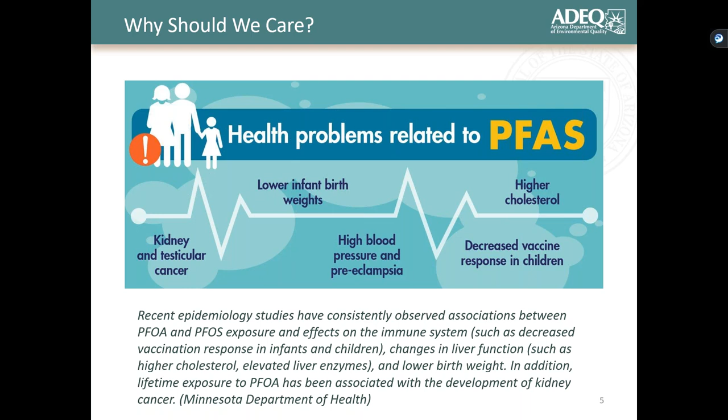So overall, PFAS is an emerging contaminant. It is something that we really, as ADEQ, are trying to take a spearhead monitoring in Arizona because of its public health issues. So what are we doing in Arizona as far as monitoring and sampling?

Well, for PFAS, we have to go all the way back to the UCMR rule. This was set by the EPA, promulgated in the 1990s. Essentially, it's asking drinking water systems to monitor for contaminants that are not yet regulated. Every 5 years they set a new list of contaminants - roughly 30. Any water system that serves more than 10,000 people is required to test for these unregulated contaminants. The UCMR rule helps the EPA monitor unregulated contaminants and judge whether they are of public health concern and if they should be regulated in the future.

There are two iterations that we're concerned with here: UCMR 3 and UCMR 5. UCMR 3 had roughly 30 contaminants that included 6 of the PFAS compounds, and this is when we first started to see PFAS crop up in drinking water in Arizona. The testing period was between January 2013 and December 2015, and we looked at water systems serving more than 10,000 people.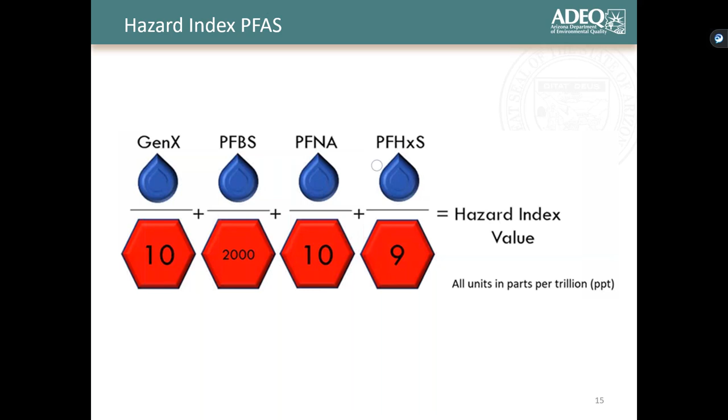So in this example, we have a system that is on a quarterly monitoring schedule for hazard index chemicals. Let's walk through example 1. This is 1 quarter. GenX had non-detect. PFBS, 200 parts per trillion. PFNA came in at 4 parts per trillion, and PFHxS, 4 parts per trillion as well. Run it through the formula, and it spits out 0.9.

For quarters 2, 3, and 4, we get 3, 1, and 2. You add all of these up together in your running annual average, and you get 1.725. Remember, we have to round to 1 significant figure. That's going to round up to 2, and that is an MCL exceedance for hazard index PFAS.

In determining compliance, anything below those trigger levels is going to be considered a non-detect. We also have the PQL, the practical quantitation level, which is related to the minimum detection level in laboratory analysis. The only time this really comes into play is when we are determining compliance with the MCL. During initial monitoring, the PQL is not a concern, but for compliance, anything below the PQL is going to be considered as 0 in the running annual calculation.

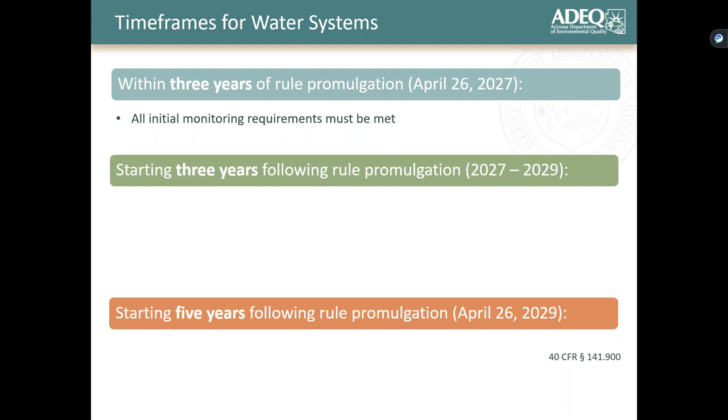So here's the time frame for water systems. It was promulgated in 2024, April 26. 3 years later, we need all water systems to meet initial monitoring requirements. 3 years following that point, so from 2027 to 2029, the results of all initial monitoring should be included in your CCRs, your water quality reports to your customers.

Regular monitoring for compliance must begin after April 26, 2027, and the results of all compliance monitoring must be included in your CCRs. If you miss testing and monitoring for PFAS, you need to submit a public notice, a tier 3 public notice, and this is when monitoring and testing violations begin. Starting in 2029, all systems must comply with the MCLs, and the public notice for any MCL violation begins at this time.

So here's some other monitoring requirements to take note of. Systems must take all their samples at the EPDS during normal operating conditions. That's important. It has to be at the EPDS, no other entry point or sampling point is allowed. If the system draws water from more than one source and the sources are combined before distribution, the system must sample at an EPDS during periods of representative operating conditions.

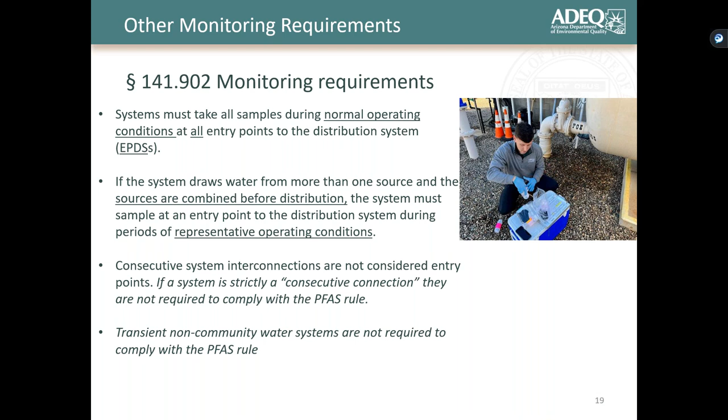So for the initial monitoring requirements, up until that point, April 26th 2027, we need to set schedules for water systems based on the type of source water they have. The EPA is requiring that all surface water systems monitor 4 consecutive quarters within a 12-month period. They call them quarters, but basically we need samples taken 2 to 4 months apart, within 1 calendar year.

The same goes for groundwater systems serving more than 10,000 people—they're also on that 4 consecutive quarter schedule. Groundwater systems serving less than 10,000 people are going to be on a biennial schedule, so 2 samples within a 12-month period, taken 5 to 7 months apart. It's important to note that if a system is using both groundwater and surface water, then they are going to be subject to that surface water monitoring schedule.

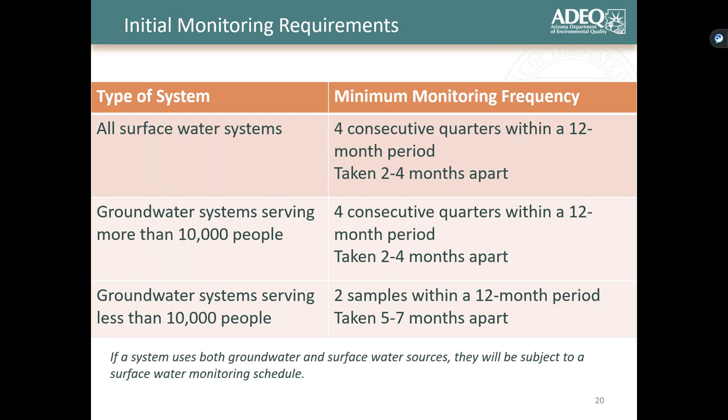So to help fulfill that initial monitoring requirement, the EPA is allowing systems to use previously acquired data. The caveat is that some requirements need to be met. The data needs to be analyzed using only those 2 methods I talked about earlier, method 533 or 537.1 version 2, and the data has to have been collected on or after January 1st, 2019, and otherwise has to meet those requirements of 2 to 4 months apart for quarterly schedules, or 5 to 7 months apart for a biennial schedule. If it meets all of those, then it's acceptable as previously acquired data.

If a system has multiple years of data, the most recent data needs to be used. Data has to be reported to a level no greater than the MCLs. So if the system wants to use supplemental data for reduced monitoring, it has to be reported down to the trigger level. And data collected on or after June 25th, 2024 must be reported down to all rule trigger levels.

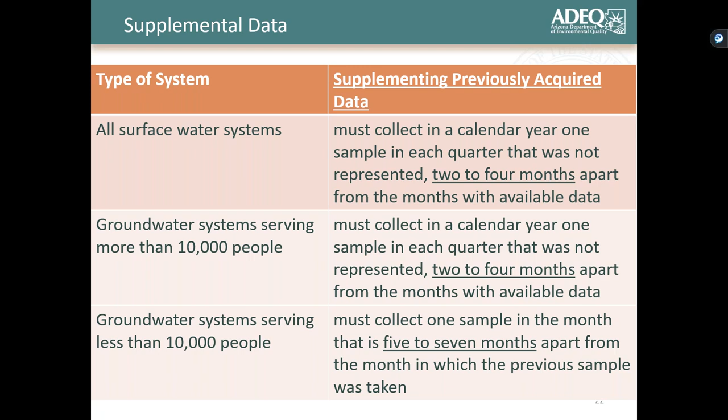So for that supplemental data, for surface water systems and groundwater systems serving more than 10,000 people, they need to collect in a calendar year 1 sample in each quarter that was not represented. I'll get to that in a little bit. For groundwater systems serving less than 10,000 people, they need to collect 1 sample in the month that was not represented, 5 to 7 months apart from that sample they collected.

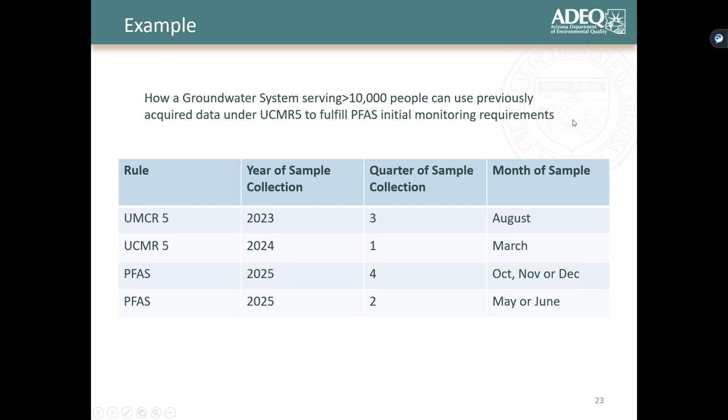So here's a brief example of how a groundwater system that serves more than 10,000 people can use previously acquired data under UCMR 5. As you can see, they have 2 samples that were collected under UCMR 5 in 2023 and 2024. They have quarter 3 and quarter 1 taken care of. So within 1 calendar year in 2025, they need to collect 2 more samples. Basically, they just need to fill in quarters 4 and 2, and that will fulfill their initial monitoring requirements.

So to go from initial monitoring to ongoing compliance monitoring, we have 3 different schedules for your ongoing compliance monitoring: quarterly, which is the default schedule, annual, and then triennial, which is reduced monitoring. 2 important points to note: when we're trying to determine compliance schedules for a system, we are going to take every individual sampling result for all the regulated PFAS and evaluate that. We're not looking at the running annual average, and we're going to compare that to either the trigger level or the MCL to determine the schedule.

Once that schedule is set and determined, compliance with the MCL is determined using the RAA, running annual average, and any result below the PQL is going to be considered as 0. So here's a breakdown of the different schedules and the conditions systems need to meet to be placed onto each schedule.

Quarterly is your default schedule. To get here, essentially, if you have any regulated PFAS concentration that is at or above the trigger level during initial monitoring, you'll be placed on the quarterly schedule. A system on triennial monitoring that has a result above the trigger level will be placed on quarterly monitoring, and a system on annual monitoring that has a result above the MCL is going to be placed on quarterly monitoring. So essentially, it's just the starting point for all compliance monitoring.

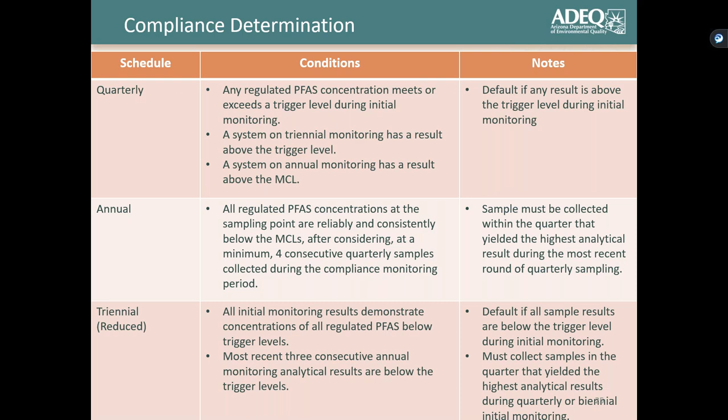If at any point, like on annual monitoring, you have a sample above the MCL, it's going to put you back on quarterly. If you're on reduced triennial monitoring and you have a sample hit above the trigger level, that's going to send you all the way back to quarterly monitoring, and you can start all over again. This is just the flow of how it works, but hopefully that lays it out in a clear, concise way for you.

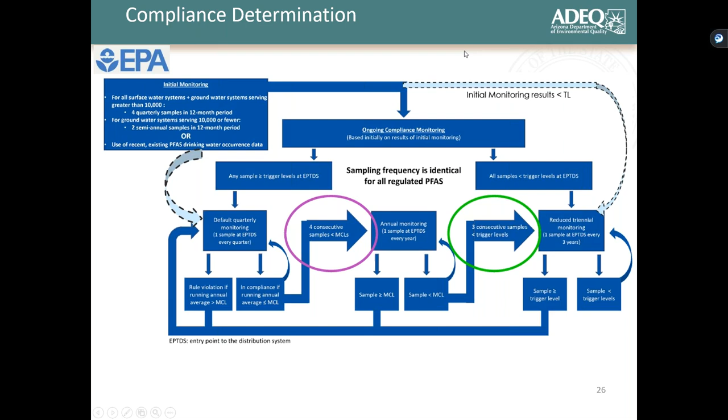Here's just a little bit of practice. So we have a groundwater system that's serving 12,000 people with 3 EPTDS. We're trying to determine both their initial monitoring schedule as well as their compliance monitoring schedule.

Well, we know that they serve more than 10,000 people, and they have hits above the trigger level, so that's automatically going to put them onto quarterly monitoring. So they have 2 quarters. They need 2 more quarters.

All right, good morning, everyone. I'm Hannah Houston, and presenting with me today is Austin Pannkuk. We're environmental technicians here with ADEQ, and we're just going to touch on some basic information on PFAS, and then we're going to review best practices for sampling techniques and some guidelines to follow when out sampling.

So since December of 2022, our ADEQ PFAS sampling team, which does include Austin and myself, have been collaborating with hundreds of public water system owners and operators and contractors to assess the impacts of PFAS on Arizona's drinking water. And to date, we have sampled over 700 water systems statewide.

So PFAS, or per and polyfluoroalkyl substances, as Gavin mentioned, are a class of synthetic chemicals that were developed in the 1940s. These chemicals are widely used in consumer and industrial products to resist heat, oil, stains, grease, and water. So they're very helpful in our common day lives. We encounter them quite often.

Some of these examples are food wrappers from fast food restaurants, coated packaging. We've got water and stain resistant coatings that are used for textiles and furniture, pesticides, and also in materials for building and semiconductor industries. So PFAS, as you may have heard, are referred to as forever chemicals, and this is just due to their persistence in the environment and also their resistance to natural degradation.

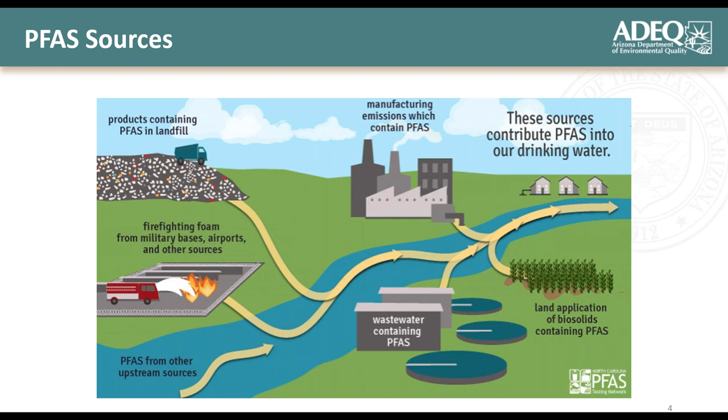PFAS sampling does differ significantly from standard water quality sampling, and this is due substantially to the higher analytical costs and heightened risk of contamination. PFAS analyses can be 2,000 to 6,000% more expensive than typical tests, and these costs can also be influenced by additional quality control measures such as field blanks.

Detections are analyzed in parts per trillion, or PPT, which is roughly equivalent to a single drop of ink in 20 Olympic-sized swimming pools. This amplifies the potential for environmental and sampler contamination, given the ubiquity of PFAS in our everyday products.

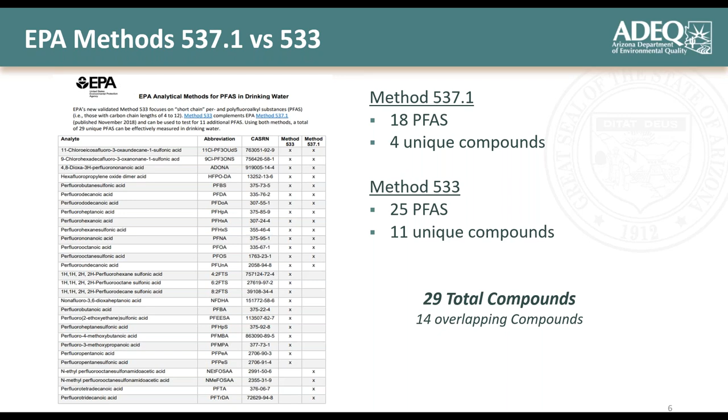Some key differences between those 2 methods are the hold times and the preservatives. Method 537.1 version 2 requires Trizma preservative and has a hold time of 14 days, while Method 533 uses ammonium acetate and has a hold time of 28 days. Both methods require a field blank with the corresponding preservative to ensure data integrity. It's not mandatory to use both methods when sampling, but if you do, it provides QA/QC and could reduce the need for possible resampling or the risk of unreliable data.

Now I'm going to turn it over to Austin. He's going to go more in depth on the sampling techniques and guidelines to follow.

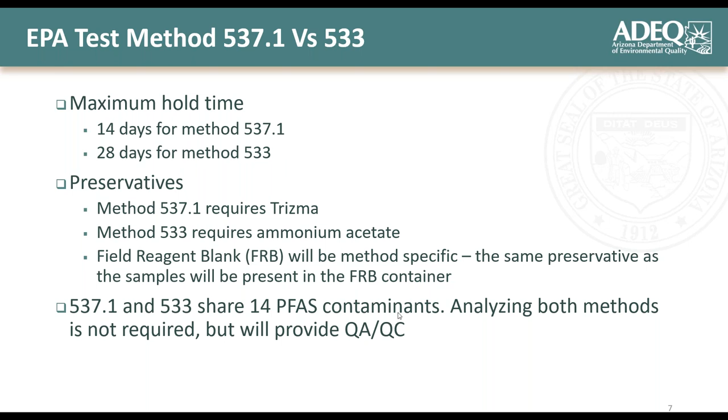All right, thank you, Hannah. PFAS sampling is something that not many have experience doing. We're glad to have the opportunity to share our experience here with PFAS sampling and talk about the nuances compared to other types of sampling.

This slide provides an overview of things to consider when collecting a PFAS sample. We'll go into further detail on each of these points in the next few slides. When you're in the field collecting PFAS samples, ensure you are adhering to the standard operating procedures, trainings, and checklists provided in this presentation. Our SOPs for each method can be provided upon request, just reach out via email and we can share them with you.

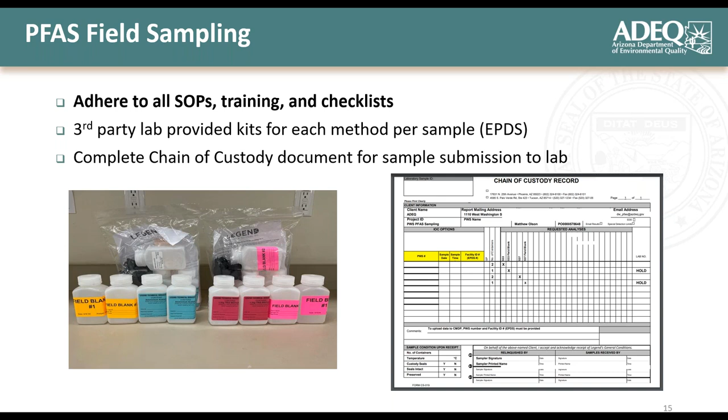We use sample bottles provided by a third-party lab. These kits come with a field blank, 2 grab sample bottles, a set of nitrile gloves, and a bag for storage and transportation. A complete and accurate chain of custody must be submitted for every sample delivered to the lab.

Since we're talking about parts per trillion with PFAS analysis, cross-contamination is a big concern. We want to ensure we are not bringing anything into the field that could impact the sample. This is a list of prohibited and acceptable items to bring with you in the field when collecting PFAS samples. It's pulled directly from our standard operating procedures and should be consulted before going into the field, to ensure you are not bringing a potential contaminant to the sample site. We'll go into more detail on field equipment, field clothing, and PPE in the next few slides.

Moving down the list to sample containers: sample containers will not be an issue if you use the kits provided by our third-party lab. LDPE or glass containers and Teflon-lined caps are prohibited, but HDPE or polypropylene containers and unlined polypropylene caps are acceptable. For rain events, avoid using any waterproof or water-resistant materials.

In the case you have a gazebo to protect you from the rain, only touch or move it prior to and following sampling activities.

For equipment decontamination, avoid using any disinfectants, but if necessary, Alconox or Liquinox and potable water from a municipal drinking water supply are acceptable, but try to avoid using water from an on-site well. For food and drink, avoid bringing anything to the sample site, with the exception of bottled water or hydration fluids, but make sure you only consume these in the staging area.

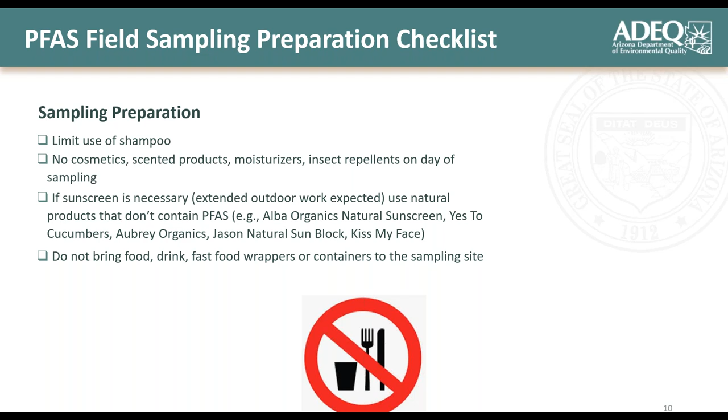Again, avoid bringing any food, drink, and fast food wrappers or containers to the sampling site, with the exception of water or hydration fluids that can be consumed in the staging areas.

You want to wear well-laundered clothing that has not been washed with fabric softener. Avoid clothing with materials like Gore-Tex, new cotton, or synthetic water-resistant or waterproof clothing. Boots and wet weather gear can be made with polyurethane and PVC, but waterproof or water-resistant materials are prohibited.

Avoid using plastic clipboards or binders. We typically use aluminum clipboards with non-waterproof paper, and traditional ballpoint pens or pencils. Sharpies are prohibited at the sample site, but can be used in the staging area if necessary. Just make sure you don't use these Sharpies on the sample bottles.

Do not use waterproof or treated paper or field books, plastic clipboards, Post-its, or other adhesive paper products. Use Ziploc brand bags for sample storage and shipping if necessary. Our kits from our third-party lab include a bag for storage and transportation, and only use wet ice for sample preservation. Try to avoid using chemical ice packs like blue ice.

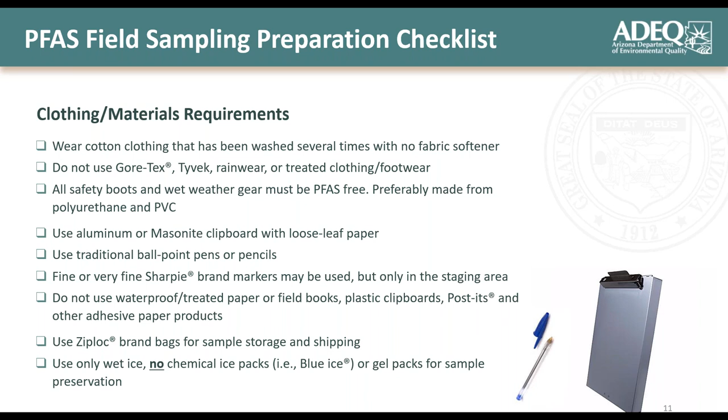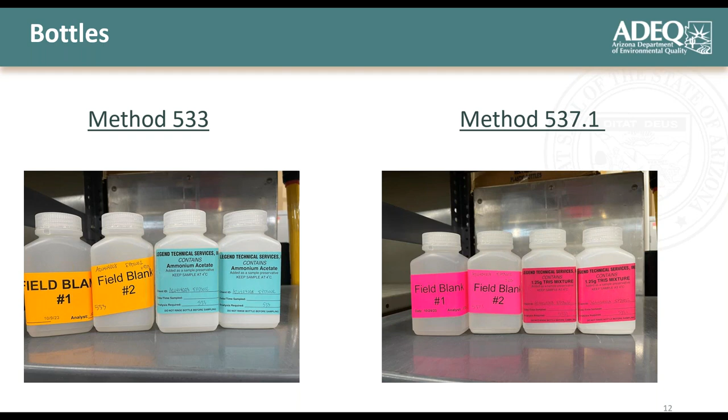Both the grab sample bottles and the field blank are labeled with the PWS number, the EPDS number, as well as the method number. There's a space below the PWS number and the EPDS number for the date and time, which will be completed at the sample site. As always, ensure all information on your bottles matches exactly to what's on the chain of custody.

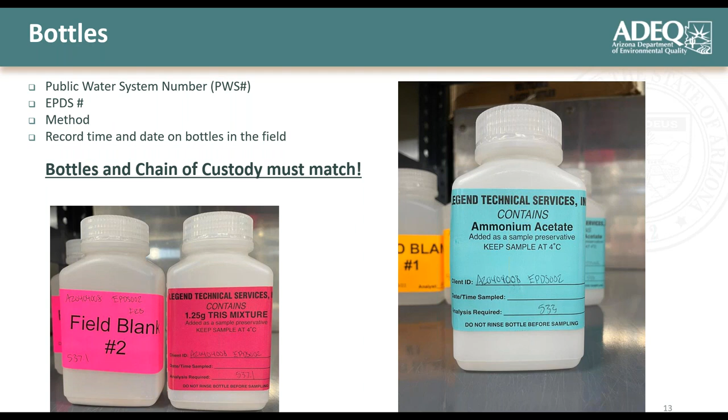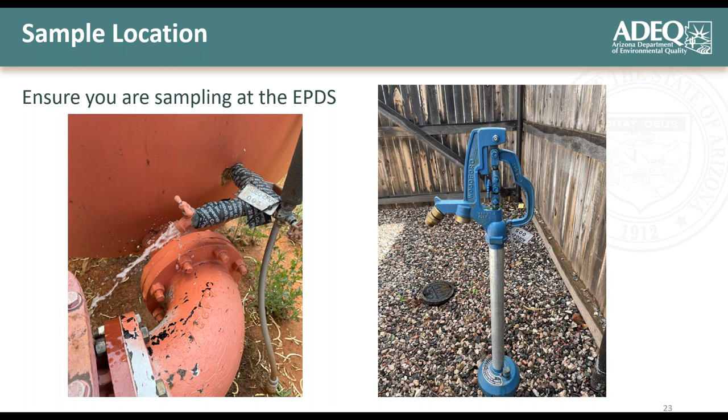Next, we'll talk about the sample location. The EPA requires these samples to be collected at the EPDS, or the entry point to the distribution system. Entry point or EPDSs can look very different, as seen in these photos. If your system does not have a tag, we'll discuss how to find the EPDS in the next slide.

If you're unsure where your EPDS is, just think about the flow of your system. Identify where your facilities are, like your well, your storage, or your treatment. The EPDS will be the last sample tap after these facilities, but before the distribution system or before water is piped into the building. Sampling at the EPDS will ensure you are analyzing finished water, which will show the best representation of the water your customers are using.

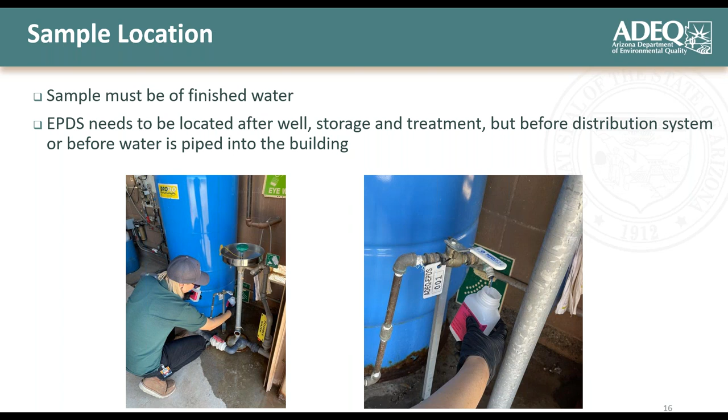Once you have found the EPDS, begin to flush for at least 5 minutes. One important lesson we have learned is the importance of flushing and ensuring there's little to no turbidity in the water. Turbidity in the sample can impact the equipment the lab uses to analyze the samples. If you notice the water is cloudy or dark in color, just continue to flush until the water is clear. If you fill a sample bottle and notice sediment sinking to the bottom, make sure you discard that sample bottle, get a new bottle, and collect a new sample.

Again, you do not want to wash out the preservative in these bottles, so the sample cannot just be dumped out and refilled. It is better to take the time to collect a quality sample. Failure to do so could result in clogging lab instrumentation and possible rejection of the sample. This would cause issues for the lab and would also require you to spend more time and money resampling.

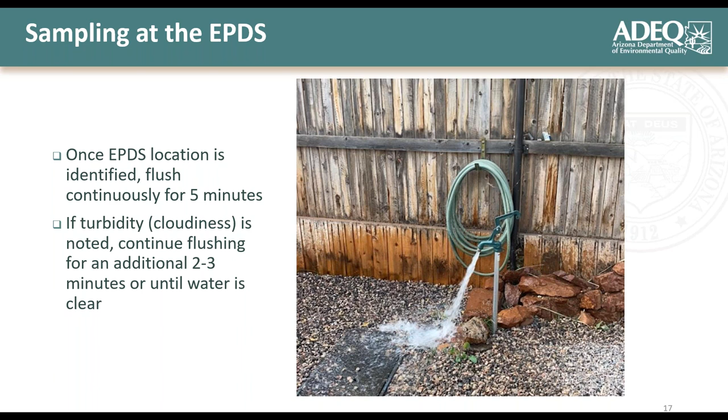Field blanks need to be taken for each method at every EPDS sample. As discussed previously, field blanks will be analyzed if the grab samples show a detection of PFAS. But if you write hold on the chain of custody, the lab will not run those samples if there is no detection.

The pre-filled field blank bottle contains lab-tested PFAS-free water. If the field blank is analyzed and comes back with a detection, it indicates there was some type of contamination at the sample site. Field blanks provide quality control and are required when sampling for PFAS.

Moving on to sampling technique: thoroughly wash, rinse, and dry your hands before collecting the sample. We recognize there may not always be an opportunity to wash your hands right before sampling. In cases like this, just wash your hands wherever you can and try to avoid touching anything that could potentially contaminate your sample until sample collection is complete.

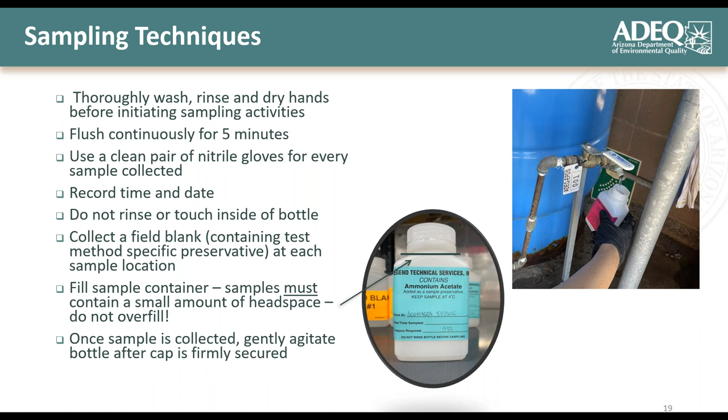As you can see here in the photo to the right, the sampler has a pencil-thin flow rate and is holding the bottle close enough to the sample tap so there's no backsplash, but far enough away so the bottle lip does not touch the tap. Then once the sample is collected, gently agitate the bottle after the cap is firmly secured.

As soon as you have completed your sample collection, place the samples either in a Ziploc bag or the lab-provided bag and put them on ice. It's important to start cooling these samples as soon as possible. Samples need to be cooled to 4 degrees Celsius, plus or minus 2 degrees, by the time they reach the lab. Also ensure you have a temperature blank in the cooler.

In our experience, if you collect a sample and deliver it to the lab within 2 hours of collection, the samples do not have to be at temperature, but still need to be on ice. This is the only case where delivering samples to the lab over temperature is acceptable. Also note that samples delivered frozen are not acceptable.

In our experience, the lab requires us to submit samples within 48 hours of collection, and this is just due to the hold times of method 533 and 537.1, which are 28 days and 14 days respectively. The lab needs as much time as possible to process and analyze these samples. So again, make sure you have your chain of custody forms with you and that they match all information on the sample bottles. If you have any questions regarding hold times or sample receiving, just contact your third-party lab.

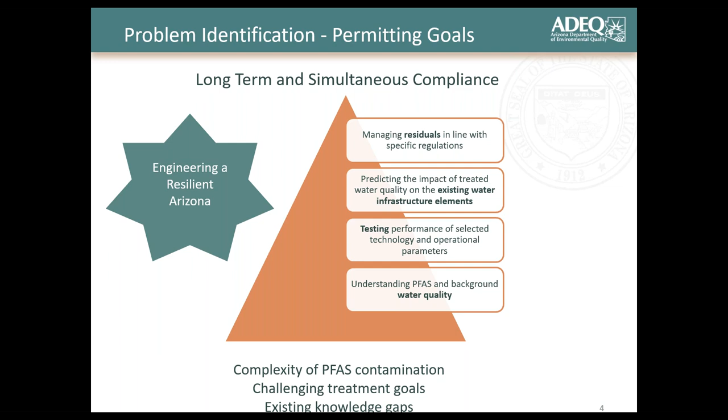So if you go a step deeper now, you will find that we have 6 permitting steps, defined in this order. First, you have to do sampling and analysis of water quality parameters. The purpose of this first step is really to determine PFAS speciation and interferences, but also to go beyond that and understand all the variations that you may have in your system.

After you're done with step 1, you should go and do preliminary design. Preliminary design means that you are supposed to select the technology type that is most suitable for the system's need. And when we say system's need, that means you have your goal, but you also have specific technical, managerial, and financial capacity.

When you are done with step 2, you go on to step 3 and you do technology evaluation. The purpose of this is to select optimal media and operational parameters.

After all these 3 steps, you go on step 4, which is approval to construct. That's actually the first time when you submit this ATC application to ADEQ, and the point of this step is to get approval to permit the final design and start your installation.

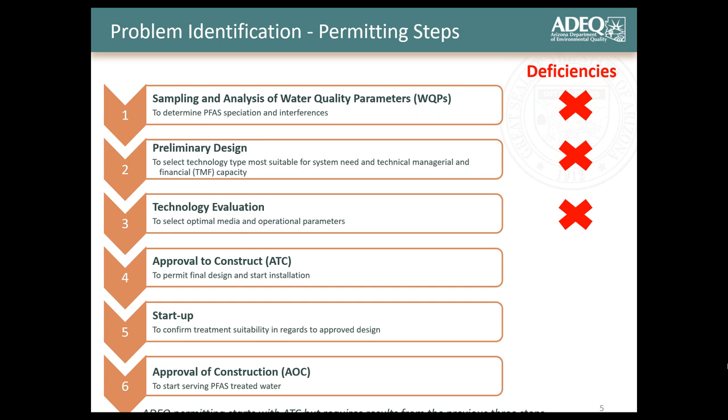So when it comes to available support and program specifics, specific programs available for PFAS, we have sampling on one side, and that means UCMR5, and also in Arizona, we have state sampling. But on the other side, we also have funds for mitigation. So this is what is available.

But the question is, is this enough for implementation? How to bridge these two available programs and support, and at the same time avoid mistakes in the 3 steps that I showed in the previous slide.

In other words, when you get PFAS exceedance, what do you do next in order to get funds and start building your mitigation without deficiencies? Well, this is where the gap is.

A simple manifestation of this gap is a common question that we hear from public water systems. Basically, when they see PFAS exceedances, they come to us and say, okay, now what? So this issue exists regardless of system size.

In Arizona, we have about 12% of public water systems, or specifically 115, regulated by the PFAS rule that will need some kind of mitigation. Of those 115, 90, or basically the large majority, are small systems, and they serve less than 3,300 people. And this is where this gap becomes even bigger.

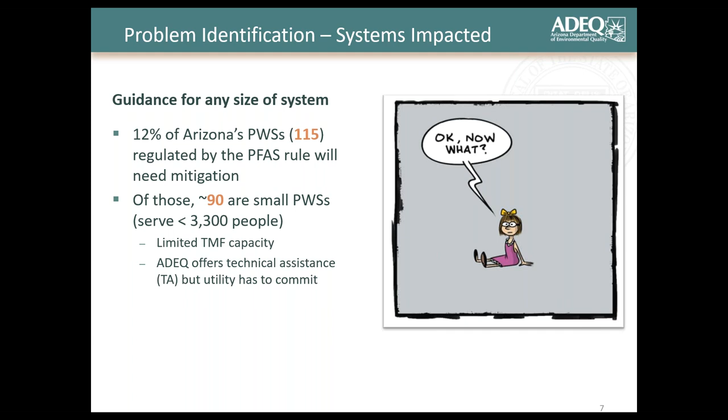And that's why we actually did this guidance to help close this huge gap. And this is the approach we took. So it's very important to define the purpose of whatever you do. In this case, we said we are doing this guidance in order to assist public water utilities. We want to assist them in making informed decisions about the most suitable mitigation strategy.

After the purpose, the question was, who is our audience? This can be very wide, and I have to tell you, whatever we say, there will always be some other side saying, well, why didn't you direct this towards us? But in this case, we said we are talking to engineers who will assist utility decision makers.

This is very important because for all of these projects, you have to have an engineer, and eventually the engineer is the one who is submitting these projects for approval. I have to stress here, we have different level engineers, and that's all fine, but PFAS is a very complex topic. So if you are looking for an engineer, you really want to look for someone who has previous experience, not necessarily in PFAS, but in water treatment design, because that's what you are looking for here.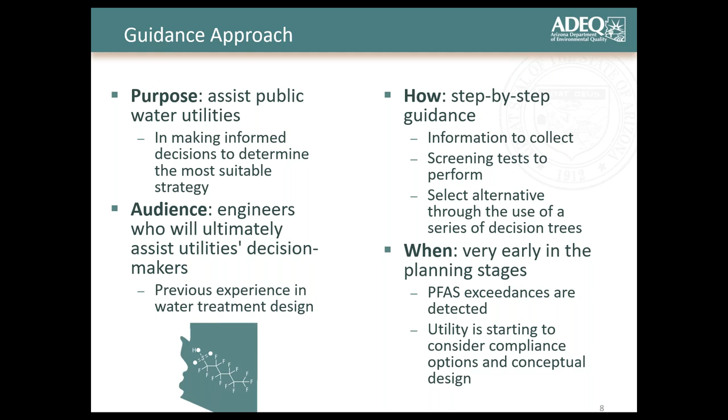So to do something like this, you need a team. But now when this document is published, I can confirm that yes, it takes a village basically. But that's the key point and value of this type of document. It's not made in a vacuum.

So stakeholders were involved from the very beginning. When I say stakeholders, that means we had multiple people from state government, then federal government, specifically EPA, or the office helping us here. Then we had non-profit organizations, leading media manufacturers, and consulting firms. And you can imagine how these people are competitive, but it was very important to bring them all together and find something we all agree to.

So let's now go into specifics and talk about what information you need in order to run this tool. To do any kind of design, you need information and data. There's nothing new about it. You can organize this and say you need to collect knowns and screen unknowns.

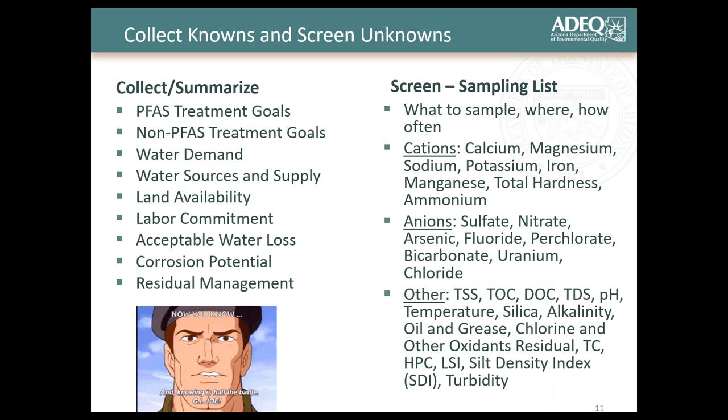So let's now talk about analysis - how to analyze with the end goal in mind. I know that with this line I'm starting to sound like a project manager, but I found it very appropriate in this case, and here is why.

End goal is very straightforward, and that's because we all want the same thing - we want to mitigate PFAS in the easiest way. But how to be more specific about that easiest way? Well, we can say in a smart way. And that means you want to get your solution in a specific, measurable, achievable, realistic, and timely manner.

So that's why we say the goal is the same for everyone, but circumstances vary and they dictate approach. And that approach can be through non-treatment or treatment options. This is how it works - your starting point should always be non-treatment, and that's because this is usually the best shot for all systems, especially those small and disadvantaged.

I don't expect you to see all the details now, but it's very important to understand that these details are your solutions for specific situations. So when you go and download this document, take a look, don't skip things. It's very important to read all of this.

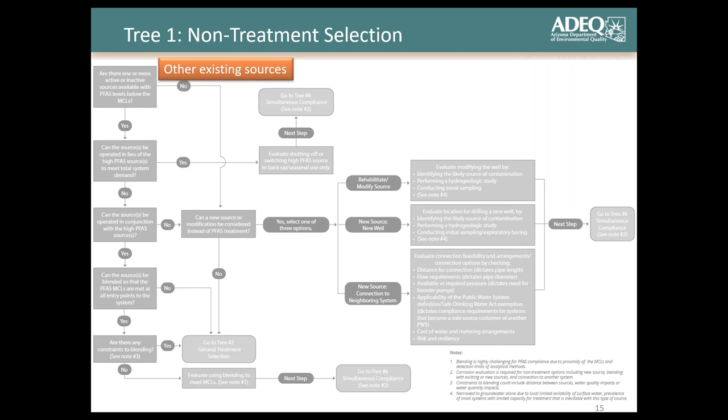But in a nutshell, non-treatment starts with asking you questions about other existing sources. And this is because you may have options to switching or to blending.

And if this doesn't work, you should think about developing new or rehabilitating existing sources. And here you have three options. So first, you should start with the option that says connecting to nearby system.

This is something that's usually opposed by systems, and it's probably because of water rights. But we had a few successes so far, and I just want to share that water rights are one thing, but eventually when you put everything on paper, when you consider what you have to do, like are you going to do the treatment yourself, or if you have potential to connect to a nearby system, are you going to do that? It's really like that techno-economic analysis.

It takes a lot to run treatment yourself. And then when you put that, you know, what it takes, but also how much it costs, I have to tell you that systems are happy eventually to connect with that nearby system if it's available. Unfortunately, that's not the option that is available for everybody.

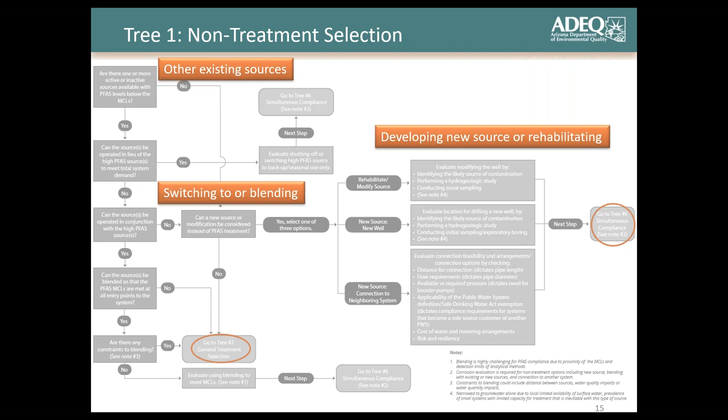And before I jump on treatment, here are a few basics incorporated in treatment trees that I wanted to cover before we go with that. First, I want to say that trees are focused on best available technology, and that's because this is your safest choice - the most reliable alternatives that have already demonstrated full-scale efficacy in the field.

And then it's important to understand that PFAS is not a traditional contaminant. So you really want to avoid backwashing here. And the only way to do that is to have pre-treatment to manage that fouling. Then think about competition.

PFAS is a PPT contaminant. So basically, everything in higher concentration is competing with the PFAS. It can be TOC, it can be anions. All of this is affecting media lifetime, and PFAS is basically losing this battle because it's in very, very low concentration, which is 3-6 orders of magnitude lower.

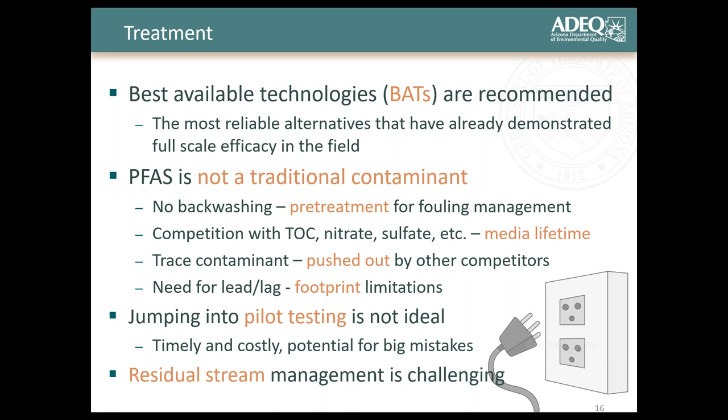Let's see how all of that is organized in the decision tree. First, we're going into general treatment selection, whose purpose is to indicate potentially more suitable treatment alternatives based on general questions. Here's what it means.

You're first asked about oxidation at the source, because not all treatment technologies are compatible with oxidants. Based on your answer, potential issues will be identified and options to solve them will be addressed. So the point of the questions is not to stop you, but to provide solutions, provide solutions for how you bypass the issues you have.

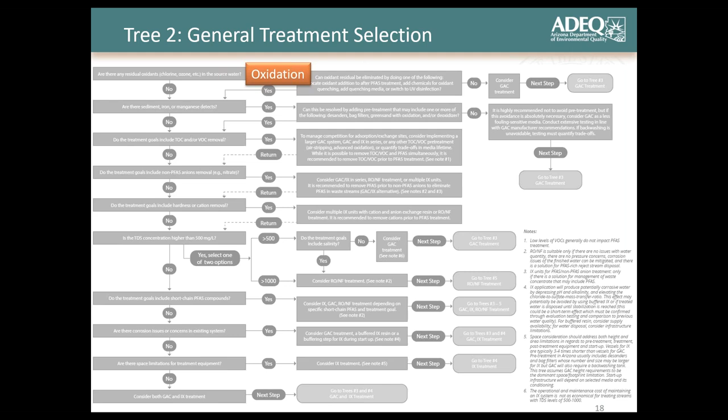The next question is about fouling. I mentioned this before - you don't want to backwash, but backwashing is for fouling. So how do you manage this? Well, you think about your fouling potential. When we say fouling, you have to think about particulates, organic fouling, inorganic, and bacterial fouling. It's a wide range of things that can foul your media.

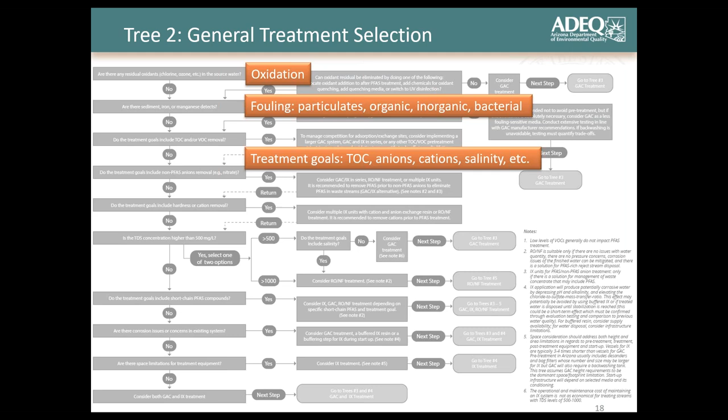Then think about treatment goals. So okay, it's PFAS, but are you targeting TOC here as well? Are you targeting any other anions or cations? Do you have any salinity issues? Eventually, what's your PFAS chain length? What are your corrosion concerns? And how much footprint can you afford for the treatment?

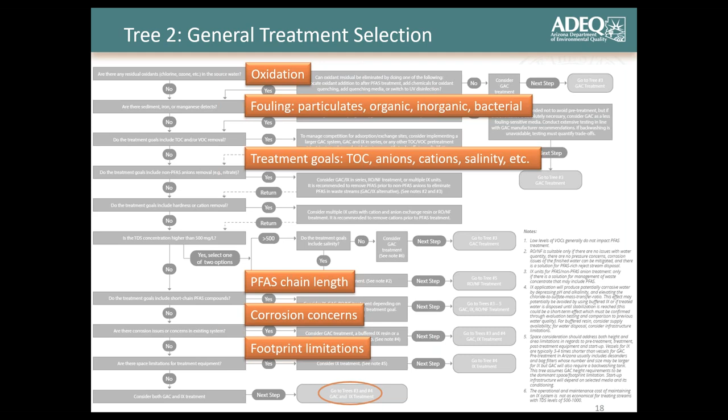Eventually you'll end up with one or more technologies, and you'll be prompted to more specific analysis about them. If that's GAC, here is the decision tree. So again, we're running through the questions, but in a more specific way, specific for GAC.

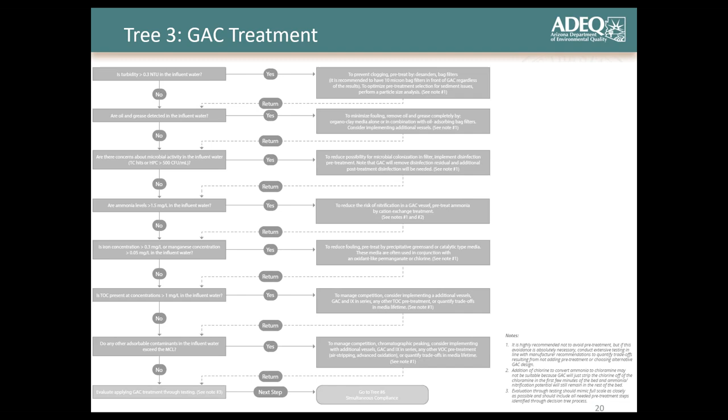Your first question will be about fouling. Again, pre-treatment is key for PFAS treatment. So run through this again, be sure what you have to deal with.

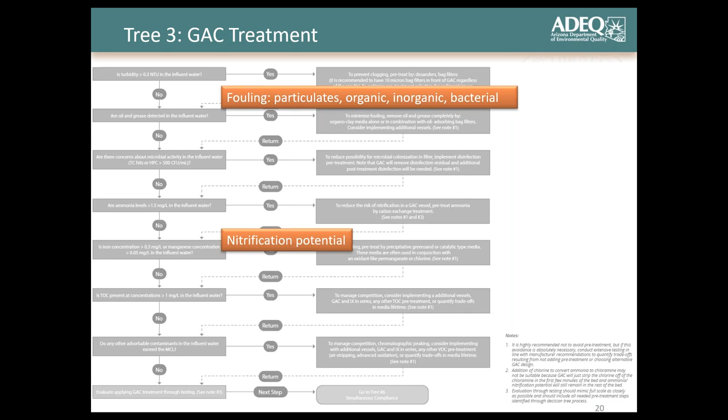Then think about nitrification potential. If you have ammonia in your source and you have GAC, you can get that nitrification issue. So you have to solve that.

Then competition - the major competitor here is TOC, but also all the other organic things. Focus here is on TOC because TOC is in ppm concentration, so it's really competing for that GAC.

And here's a very important message. It's asking if you have TOC more than 1 ppm. People very often ask me, why 1 ppm? Well, this is because we know competition will start to play here at this concentration, and that will affect media lifetime. This concentration doesn't tell you to stop - if you have more than 1 you cannot use it - no, it actually says this will impact your media lifetime and eventually your cost analysis. So this is a red flag. Consider this, because it will affect how much you pay every time you change your media.

So finally, each tree leads to treatment evaluation. This is because these trees offer you preliminary screening, but you still need to get more specific about treatment performance, and you do that through treatment evaluation, through treatment testing. There's also simultaneous compliance to check, which basically tells you how this PFAS solution may affect other processes and rules.

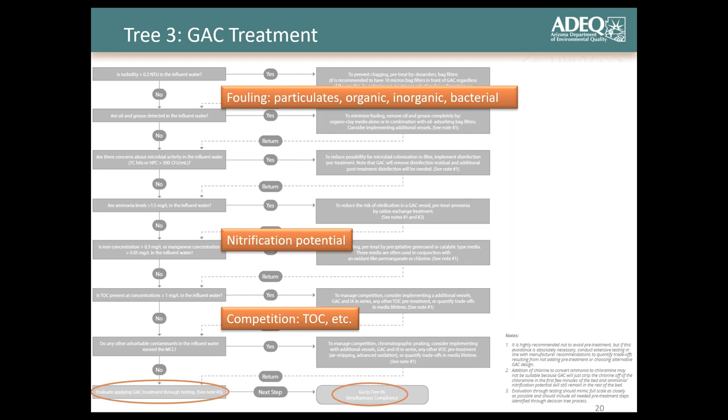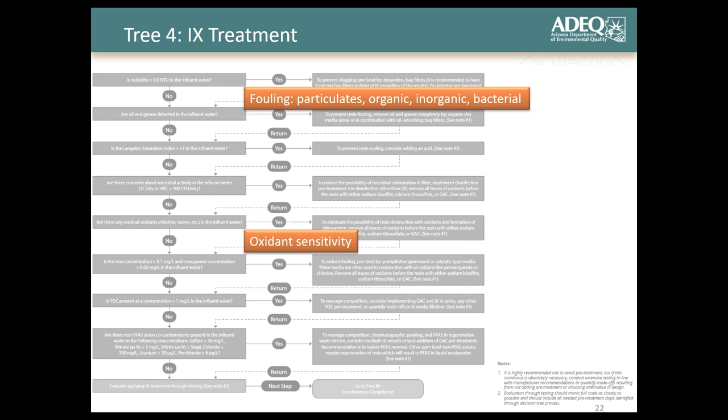If you do, this will degrade your ion exchange, but it will also make a byproduct called nitrosamine, so be sure that you check for this. There are solutions provided here, but you have to avoid having any oxidant in contact with your ion exchange.

When it comes to competition, now we're talking more about anions, so they compete more here. With GAC we had organics and TOC; here we have anions such as nitrates and sulfates. So this ion exchange will remove more than PFAS - if you have nitrates and sulfates, it will remove them as well. The tricky thing is that nitrates and sulfates are at ppm level, and these ppm levels are very high. In sulfate's case, in Arizona, we have a few hundred, so competition is very high.

Again, competition affects media lifetime, affects your cost. Like with the previous tree, when you check all of this, it will lead you to evaluate this treatment technology and eventually to go on to simultaneous compliance.

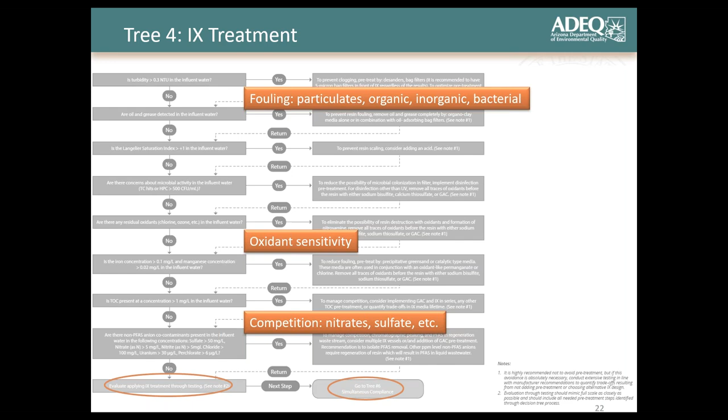Finally, the third best available technology is high pressure membranes, and here we have RO, so reverse osmosis and nanofiltration. While this approach should not be the primary option for Arizona, it is important to say that there are situations where this is the only and best way.

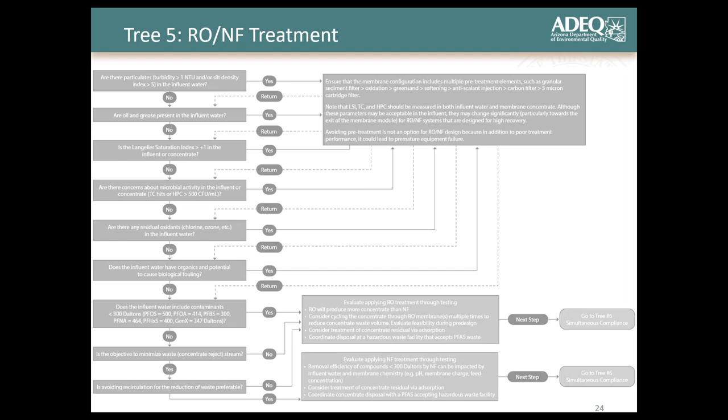Examples for this application are usually complex water matrices with extreme salinity and multiple treatment goals. Specific for membranes is that pre-treatment is not a choice or part of optimization like what we had with GAC and anion exchange.

But rather a necessity because of potential for equipment failure. So first you have the question about fouling, and again, all of these fouling categories. Before I go on to the next one, I want to say that fouling characterization is not only a matter of raw water here, but also recycled streams, because this is what you have with high recovery membrane processes.

With adsorption, you really think about fouling in your influent stream, in that raw water. But here, you also have to think about this for the stream that you are going to recycle to get that high efficiency recovery. So it's more into that.

Then you will think about oxidant sensitivity, because polymers are again the basis of these membranes. So you have to be sure that you protect the membrane from degradation. Oxidant should not be in contact with any kind of polymer. The membrane has to be protected.

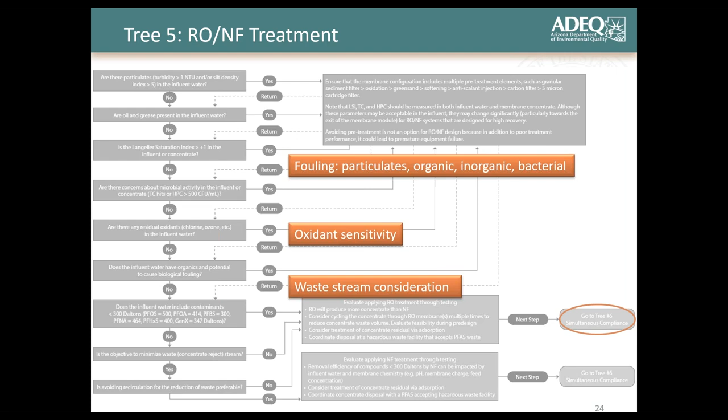Again, after you run all of these questions, you will be directed to simultaneous compliance. Let me tell you now about simultaneous compliance. Here is the official definition coming from EPA. But in other words, I would say simultaneous compliance means whatever you do for a new contaminant, like PFAS in this case, whatever change or adjustment you make, you want to be sure that you don't mess up the downstream processes and other rules. You want to address PFAS, but not at the cost of any other regulation. In this case, the simultaneous compliance tree is focusing on corrosion control and bacterial control.

Corrosion control is very important here because any kind of change in source water or treatment requires you to do a corrosion control evaluation, because all of these changes can affect corrosion. So you have to go and check what those impacts are. And then when it comes to bacterial control, it's really focused on treatment techniques.

Because whatever you do, you will have water stagnation within your filter. And then depending on the treatment technology, you can also have fines in your effluent, and those fines can carry bacteria. So you want to be sure that you have disinfection as the last step of your treatment train.

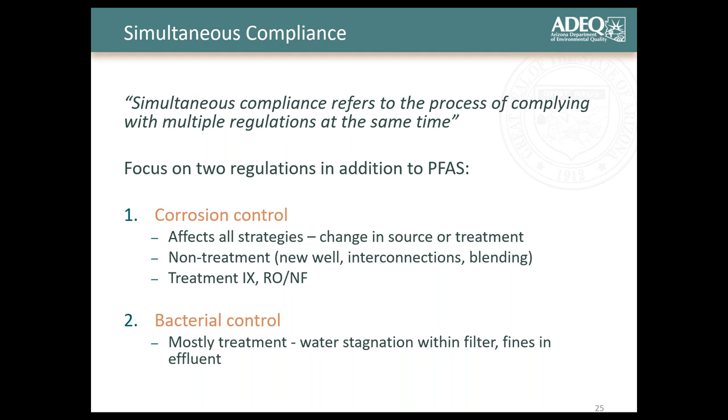Okay, here is the simultaneous compliance tree. You can see that the difference is basically made between non-treatment and treatment alternatives. But both of them lead to corrosion evaluation, because as I said, the corrosion rule says if you have any kind of source change or treatment change, you have to go and check for this.

And then eventually treatment will lead you to post-disinfection. If you didn't have disinfection before in your system, you should also know that after adding one, you should go and check corrosion control evaluation. You should do that evaluation because any kind of disinfection changes the oxidation potential of water, and with that different oxidation potential, there's concern about corrosion.

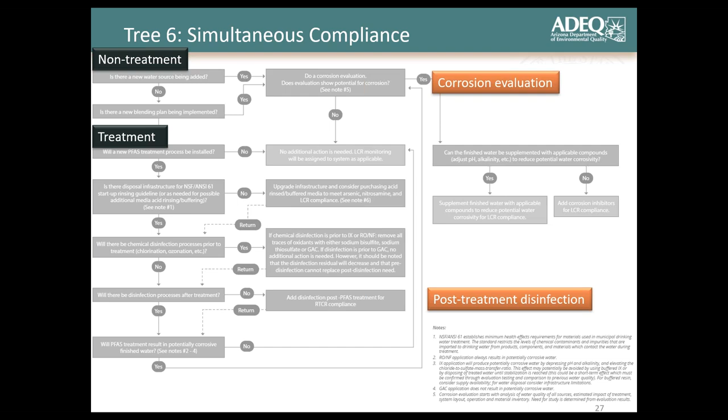So I will now go and summarize key takeaways from the decision trees. First, I would like to say that selection of the best PFAS mitigation is utility specific. There are many factors to consider here, and it's more than media lifetime. So if your neighbor has one type of treatment, don't think that's your best option. It's okay to consider that, but this is really utility specific.

Before you jump into treatment, consider non-treatment. That's your starting point, and that should really be a priority to explore for small and disadvantaged systems, because that's the easiest way to address this. If you really have to do treatment, I have to say it's not easy, but yes, you can achieve that.

If I was asked about one major thing that makes PFAS treatment different than any other treatment, I would say don't forget about pre-treatment. It's essential here, and it's probably required. I didn't see any PFAS treatment going without pre-treatment. So don't forget about that.

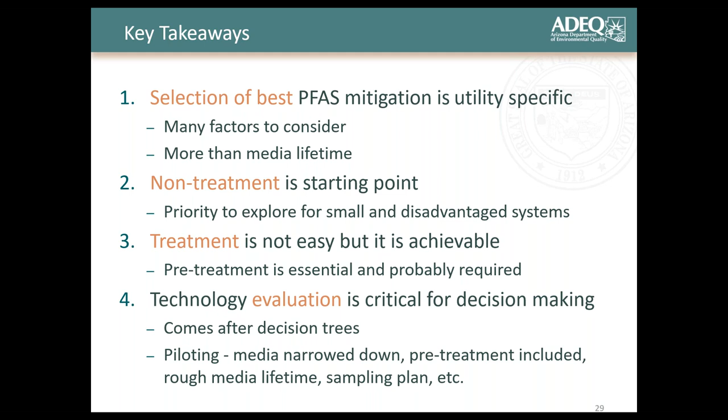Then collaboration. Collaboration is very important here. I would say there are 4 major parties when I talk about collaboration. It doesn't mean it's limited to 4, but at least I see 4 major ones. So you will have the utility that has PFAS and is seeking a solution. The utility will have an engineer, and the sooner you get an engineer, the better it is, because the engineer is the one that is going to make this connection.

The engineer will start working with vendors, getting their support, and then before applying for anything from ADEQ, that engineer can definitely come to us and clarify all kinds of requirements, get answers on all the questions.

But we want to see clear expectations from the utility, involvement of the engineer, and vendors and manufacturers are there to provide support, so use that. Eventually what we are trying to do here as a regulator is to provide transparent expectations, because if you know what you are looking for, it should be much easier for you to do that, and for us also to permit your solution.

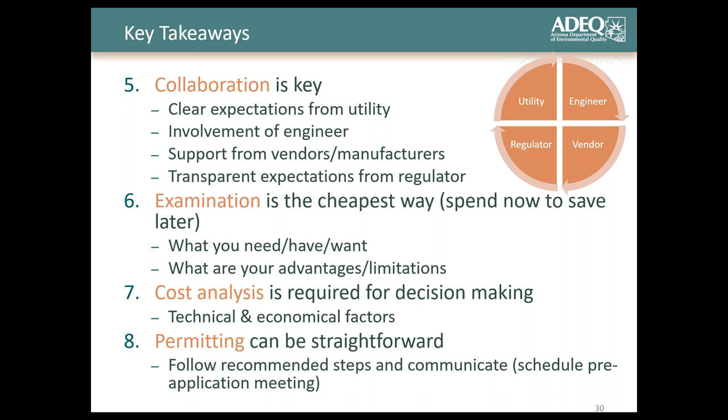And now I would like to switch to support from ADEQ. So this is beyond decision trees, but if you didn't do it already, please get your copy now. Here is a QR code. It's available on our website, and just yesterday we also published an interactive version. See what works better for you, either go through all of these decision trees, or the interactive version will ask you specific questions, and then based on your answer, it will lead you to another one.

That's about decision trees, but there are other available resources. So all our trainings are available on our YouTube page, and here is again a QR code to get you directly there. This training will also be available on the same place. And I think my colleagues talked about this before, but there is a PFAS interactive map, so you can see the latest results through that.

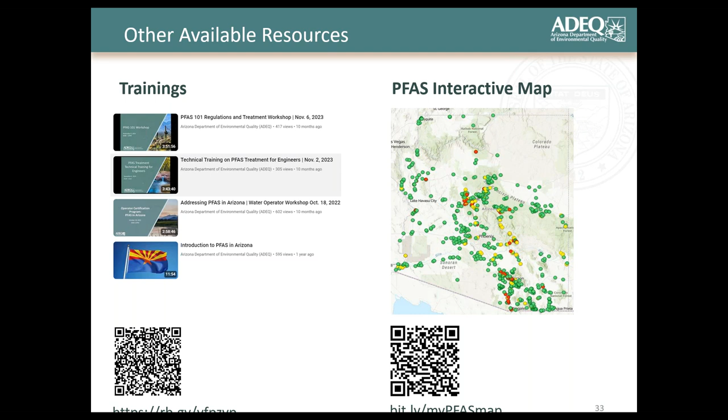And hopefully this is not the end of support coming from ADEQ. Our future plans are based on 3 groups of activities: we are working on guidance documents, we offer pre-application meetings, and we do a lot of trainings. And this is a great opportunity to announce that our second PFAS forum is scheduled for February 13th.

2025. It's going to be an in-person event in Phoenix, and I expect that the ADEQ announcement about this will come out soon. We had one last year, also in February, and it was a great success. So we are hoping to repeat that and provide all new updates with this upcoming one.

But now, if you focus only on guidance documents, I would like to say that we are working on a few of them, and they all rely on decision trees, because decision trees are basically the foundation. So we are working on testing protocols, cost tools, waste management, and point of use and point of entry guidance documents. If you have something else in mind or are looking for collaboration, please let me know. But this is what is in process as of now.

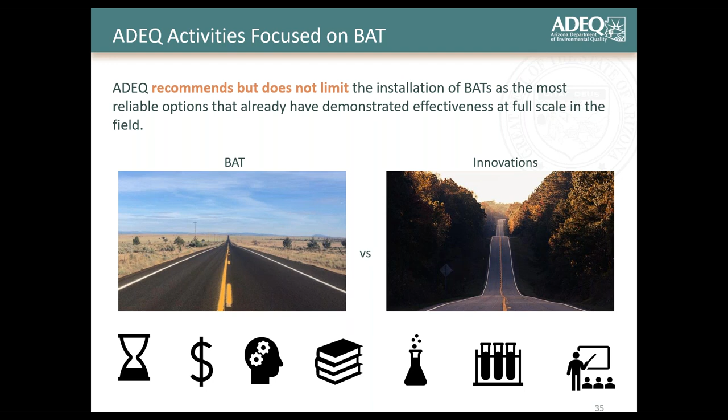And then I have a few slides just to provide a sneak peek at what is coming. I think we are good with the time, so I will keep going here.

Then how to define hydraulics, because when it comes to pilot testing, you want to mimic your full scale. So you have to do that pre-analysis. You have to know what is the empty bed contact time that you will have in your full system, but also hydraulic loading rate. You define that, and then based on your plan for full scale, you come back and apply that to pilot. That's the only way to get meaningful results.

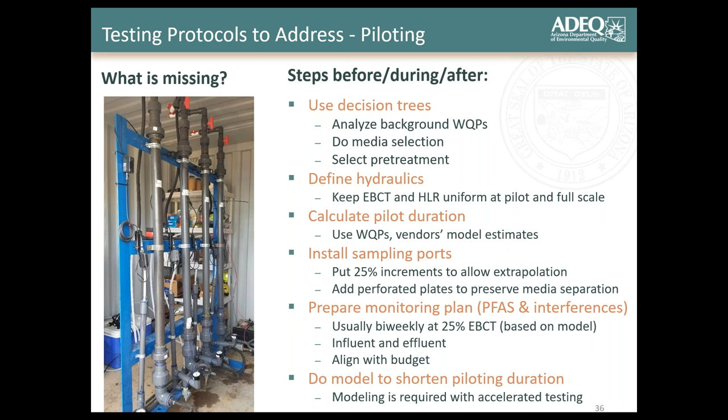And then, as I mentioned before, think about modeling. Modeling can shorten pilot duration. We also plan to provide guidance here on what models are available, how you access them, they're free of charge, and as far as I know EPA is also providing support on how to run these models. But you have to be very specific here, you have to know the purpose of the model and how to use it at what stage.

The most common mistake is that people think a model can replace testing. No, it cannot. A model can supplement testing, and that's a great combo. But don't think you can just go and do the model yourself, because all models are about calibration. You have to put in good test data, beyond just water quality parameters, in order to get reliable model predictions. So it comes down to your interpretation, but model and pilot testing combined, that's a great example of collaboration.

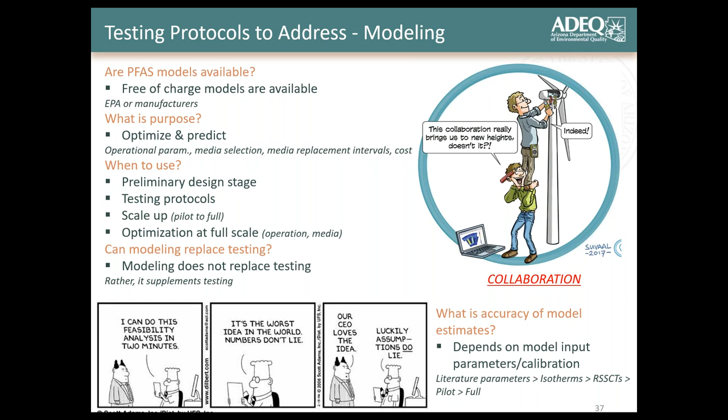Then, as I mentioned before, the other guidance document we are working on is point of use, point of entry. That document should come out soon, I'd say next 3 months if I have to guess, at least that's my plan. This document is going to be structured as frequently asked questions, because none of us have time, so if you have specific questions, you should be able to jump between them and get specific answers.

This document is going to cover more than PFAS, but it's very important to know that at the moment, point of use and point of entry devices are not recognized as a compliance option for PFAS. This isn't connected to ADEQ, this isn't our standpoint. It's basically because there is no NSF certification at the moment aligned with the MCL. So what's on the market are units certified for PFAS at an effluent of minimum 20 ppt, which is 5 times more than the MCL.

We expect this is going to be solved soon. I know NSF is working on that, but until then, you can use this for your household, but it cannot be approved as a compliance option.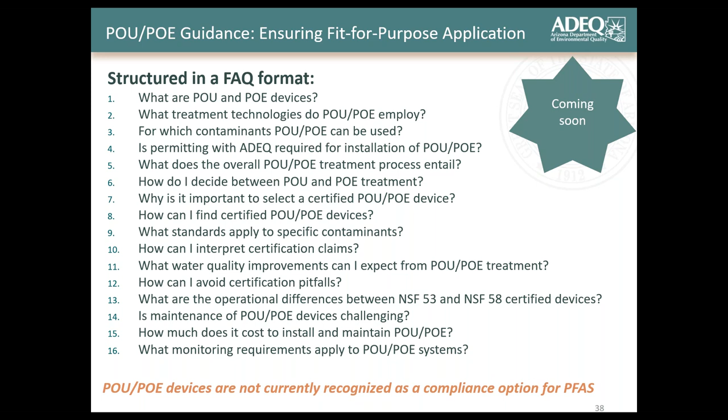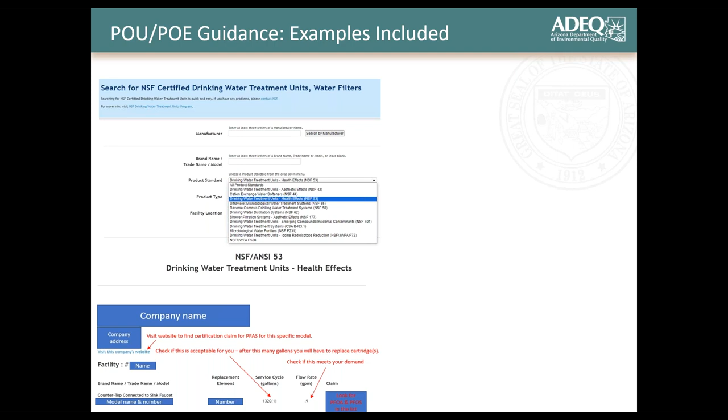This document also includes examples. The first one shows how to search the NSF database. The second one points out what information to look for in that database. This is what you will get through the NSF website, but this isn't going to be enough. That's why it's important to find a claim for that specific unit and model. This is an example of one claim, and we will also explain how to read the claim.

And this is the end of my presentation. Thank you for your attention. I think now it's our time for questions. We are 7 minutes early, but...